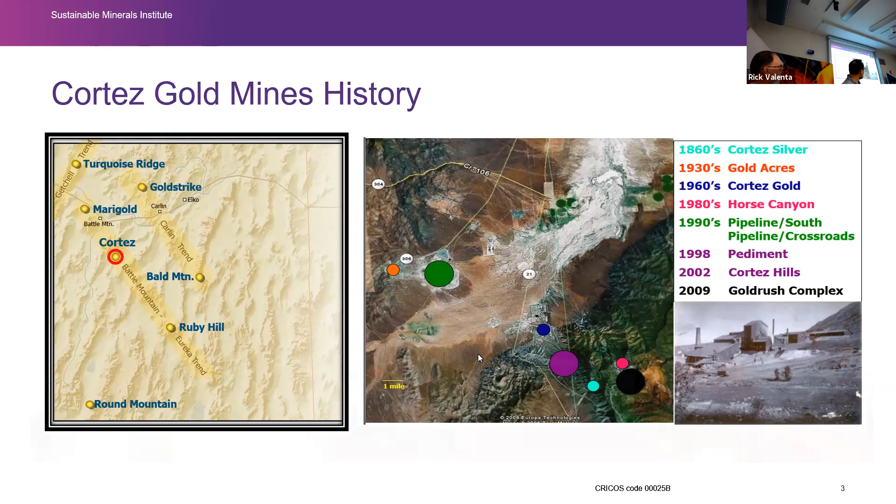So the main objective of the project was to improve operation efficiency and to reduce the risk to Cortez Mine from processing those more competent ores from Pipeline and Crossroad pits. In addition to that, at that time, Barrick was implementing a huge digitization program, and we were asked to provide necessary tools and knowledge that could be used in that program.

So the digitization program involved collecting information from geological information, drill and blast information, all from blast hole to stockpiling, in order to help to run the plant. Okay.

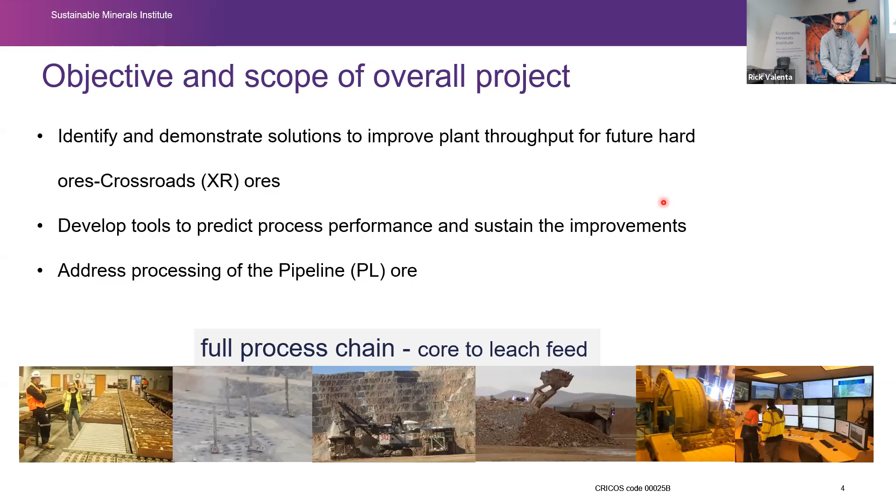So while we were there, the JK team identified several opportunities for the plant, and we need to be fair to the Cortez staff, because they were processing chop ore, which was very easy to grind, and it had a lot of gold. And it was unusual for the mine.

They have a daily limitation on how much material they can process due to environmental issues. So from their perspective, while processing chop, they would easily reach those daily limitations, so they had to push back with the throughput. So in their eyes, there was no incentive to do any plant upgrades, because the plant was performing as required.

However, we identified these opportunities to upgrade some equipment so the plant would be in better shape for those future more competent ores.

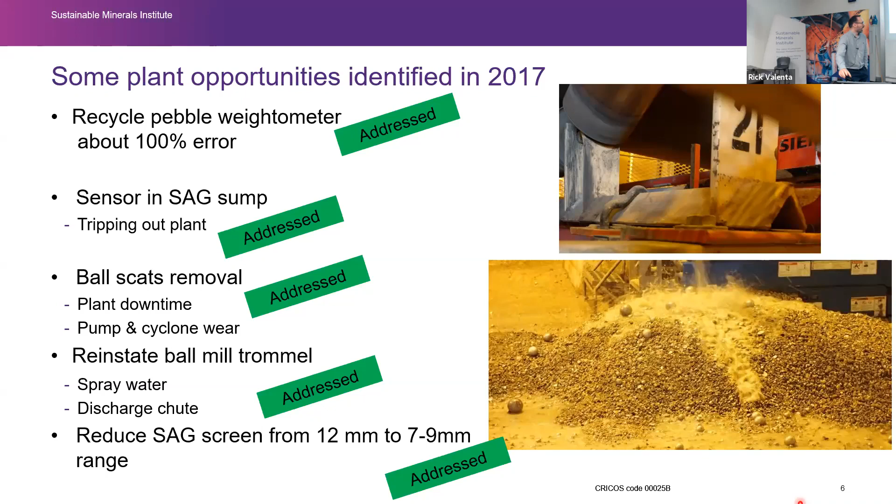We also recommended to change the SAG screen to reduce the aperture on those SAG screens from 12 millimeters to 8. The idea was to allow the SAG mill to do more work than now, which would help the ball mill circuit. And because of all the situation that Cortez was facing, they all agreed to change everything, and I'll keep going.

And what they realized soon after they upgraded is that those plant upgrades were very beneficial for treating pipeline ore. So the throughput jumped, and they were very pleased. And all of a sudden, pipeline ore became low priority for them.

In addition to that, the plan to stop mining the Chop pit has been changed, and they kept going. So originally they thought to close it by the end of 2017, but they kept mining it in 2018, 2019, because there was still more ore, easy to grind, and of course they were incentivized to do that. So all of that caused the priority of the whole project to just go quiet.

So we were not asked to come back to site and validate our predictions, because the Crossroads ore wasn't available, which was fair. And the transition from the Chop pit to the Crossroads pit started in the second half of 2019.

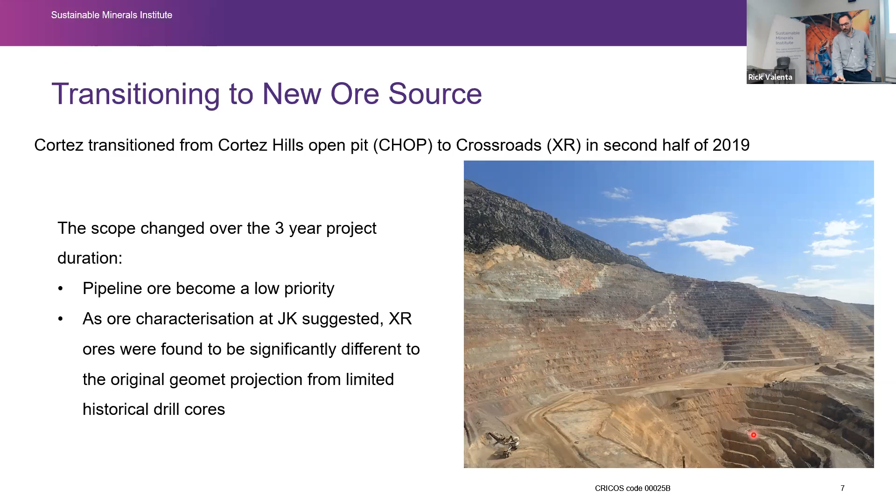So there are two major geological formations located in the Crossroads pit: Horse Canyon and Wenban ore. What was noticed is that Horse Canyon ore was much finer, and Wenban coarser. They didn't have any ore characterization results on these ores. So no drop weight test, no Bond ball test. So they didn't know how competent those ores are.

But they noticed that, not surprisingly, mill throughput when they process these ores is correlated to the feed size. Initially, when they started transitioning to the Crossroads ore, they noticed a slight drop in throughput, around 4%. That's when they were treating Wenban ore. But in September 2019, when they started processing Horse Canyon, they saw a significant drop in throughput, about 20%, and that drop of 20% was very similar to what the JK team predicted.

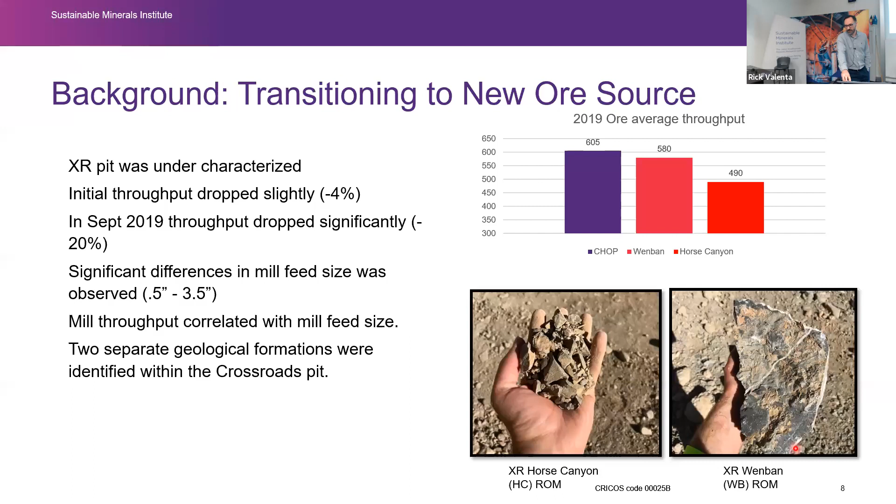So in January last year, just before, I mean, there was a lot of news about the virus, the COVID thing, but we managed to reach the USA, and what we noticed is that both Wenban and Horse Canyon ores had dropped in throughput, and they had similar throughput, unlike previously when the plant had achieved higher throughput while processing Wenban ore.

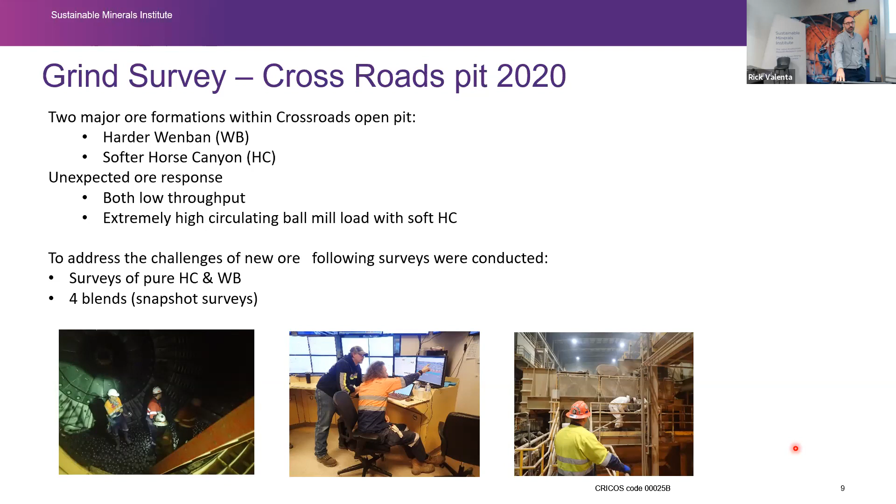And also what we noticed is that for the Horse Canyon, the recirculating load in the ball mill circuit was extremely high. So we proposed two full surveys for those pure ores, and four snapshot surveys for the blends.

So based on our previous work at Cortez, we understand that the SAG mill filling has a strong influence on the performance of the overall circuit. And ideally, the SAG mill filling should be somewhere between 25 and 35%, but in this case, it wasn't the case. So what we noticed is for the higher filling, the SAG draws more power. More power means better grinding in the SAG circuit.

As a consequence, the transfer feed size to the ball mill circuit will improve, and that will help the ball mill to draw more power, generate more grinding, more efficient grinding, or generate more fines, and as a result, the product size will get finer. So, yep, the SAG power goes up, ball power goes up, and the grinding P80 goes down.

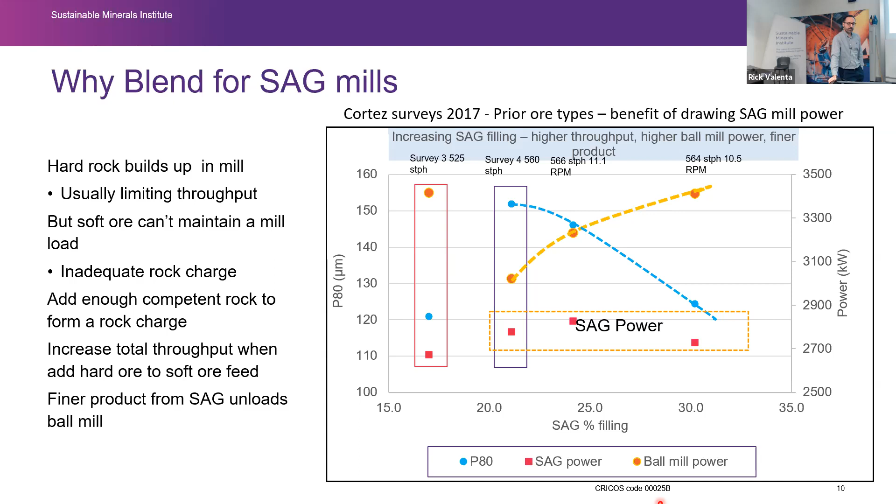Therefore, blending soft and hard ore should increase the SAG filling, improve the grinding in the SAG circuit, help the ball mill circuit, and we should see the increase in throughput. I have to say that there's other ways to increase the mill filling: opening the gaps of the crushers, optimizing the blast, changing the SAG speed, percentage solids, and other ways. But there's no time, and there's no need to talk about those topics now, and I'll be focusing only on blending during this presentation.

So in order to run those surveys with ore blending, Cortez prepared 2 mini stockpiles of pre-blended Horse Canyon and Wenban material. Those were approximately 50,000 tons of material each, and they prepared it by just using the large trucks in different ratios. So we have one stockpile which has 16% of Horse Canyon, and the other was 75%. Well, when you say stockpiles, the size depends who you are talking with. So those mini stockpiles,

material from those stockpiles was fed to the primary crusher in different truck ratios to create 4 different blends. So at the end we have 4 blends, with the percentage of Horse Canyon ranging from 16% to 75%. Because there was a stockpile between the primary crusher and the SAG mill, this stockpile was coned out, and that blended material was fed directly into the mill, just to minimize the transition time from one blend to the other.

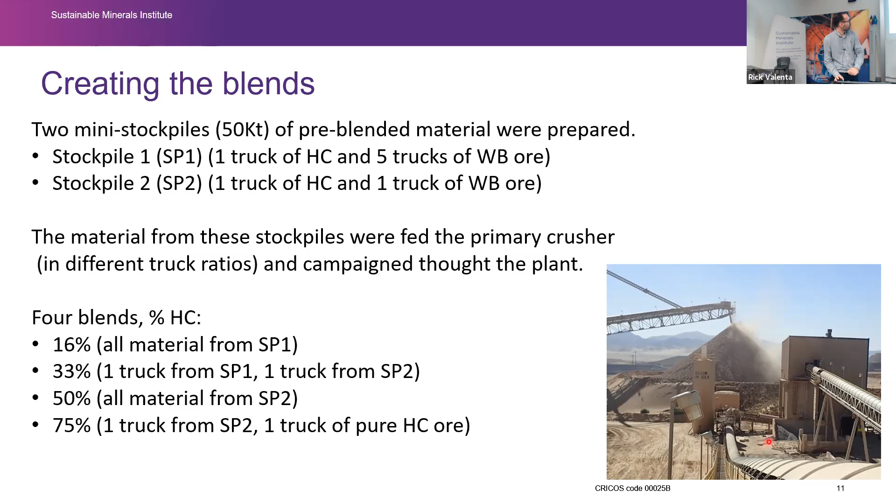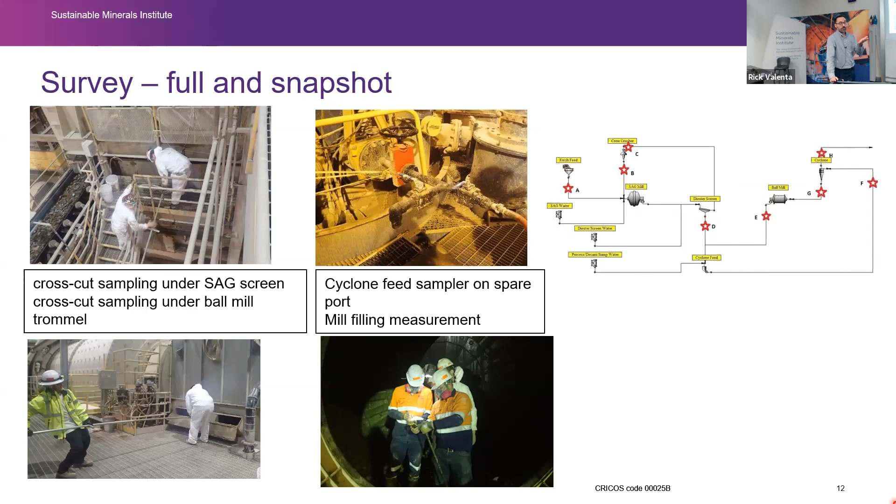For the 4 blends, we conducted only snapshot surveys. During those we collected just the SAG screen undersize, so we know what we are feeding to the ball mill circuit, and the cyclone overflow. We didn't do any crash stop, but we used the calibrated Mill Fit to calculate the mill filling. Samples from the SAG feed and pebble crusher material were collected and characterized. Based on A times b results, Wind Band material was slightly more competent than Horse Canyon, but it requires less power for ball milling than Horse Canyon.

So during the survey, we noticed that Horse Canyon was finer. The material that we are feeding the SAG mill was finer in case of Horse Canyon, and it was less competent, so mill filling was lower, and the SAG drew less power compared to Wind Band.

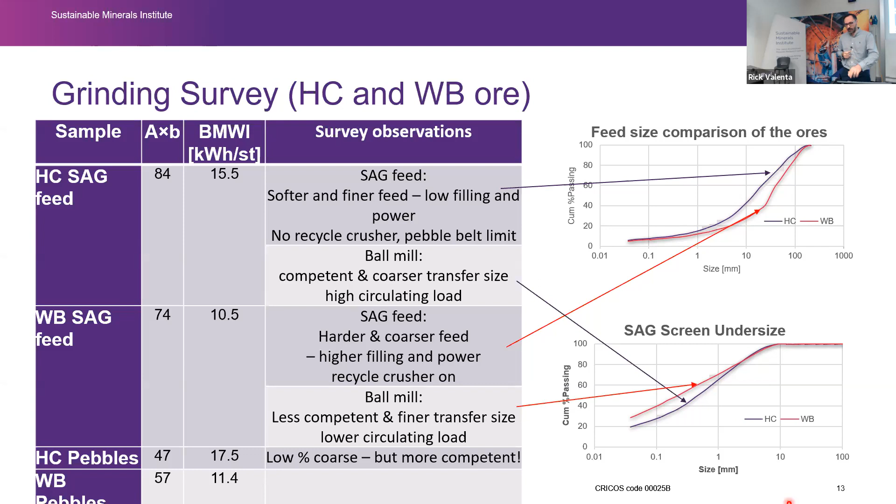So these are some results. These are the results of the blend. So as expected, the more competent Windband had higher mill filling compared to pure Horse Canyon, and blending soft and hard ores achieved higher mill filling, and that helped with the grinding.

So, as I mentioned, the Windband and Horse Canyon achieved very similar throughput, and for all blends, we got much higher throughput. The highest throughput was achieved with the blends of 33% of Horse Canyon. So for these blends, it's not just the high throughput we achieved. The P80 achieved here was lower as well. So we have higher throughput and we are grinding finer.

And in order to compare what was the most efficient grinding in all these cases, we calculated specific energy of producing minus 75 micron, and it shows that the 33% Horse Canyon blend is when the most efficient grinding was achieved.

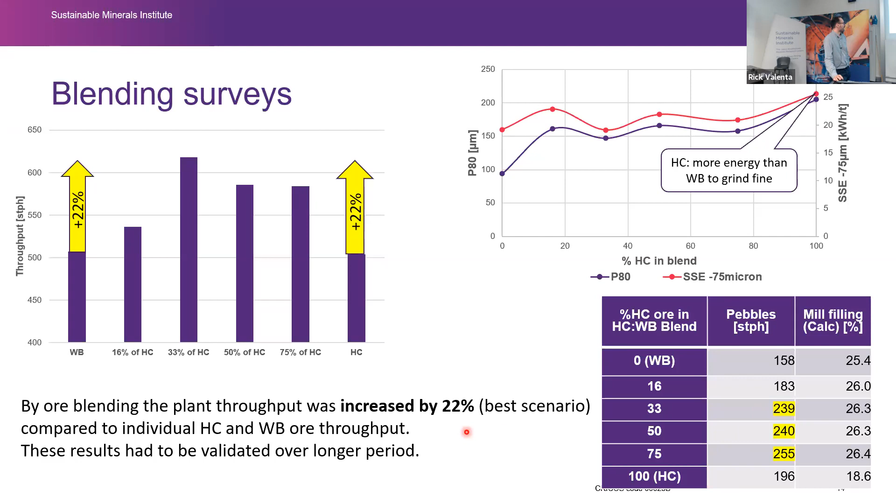Just to mention that we couldn't push throughput further because of that limitation on the SAG, on the pebble belt that we reached. So this was the best we could get. So Cortez decided to test the blending strategy on a larger scale. They needed more room where they could create bigger stockpiles, and because the pit wasn't operating, they removed the conveyor belt that connects that pit with the plant and expanded what they call the PLOR pad. So it can store 1.2 million tons of material.

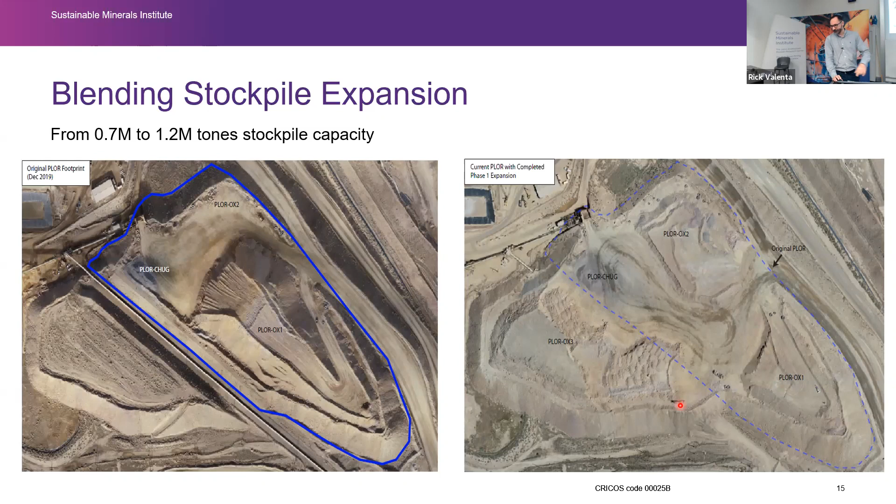So during the period from January, just after the survey, all the way to June, so a 6-month period, they were testing different ore blends, different ore types. The blending process had to be stopped from time to time because in parallel they were doing the upgrade of those PLOR pads. But what they noticed, as soon as they stopped doing the blending, was a drop in throughput. So all those results were collected, and the information about blends and the average throughput over 12-hour shifts were analyzed.

So out of those 6 months, 42% of the time they were conducting blending, and out of those, almost half of the time were blends of Horse Canyon and Windband. So these are results just for the blends of those two ore types. They were doing other blends, but these are just two. So the error bars: because we collected so much data, we could calculate 95% confidence intervals, and the error bars represent those intervals.